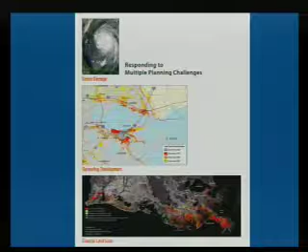I attended some of their meetings. The outreach was unprecedented, and it is the capstone of the many new urbanist projects systematically done in Louisiana under the aegis of the Center for Planning Excellence, which was formed as the client for this project, working with Calthorpe and Associates.

What they did is cover the 35 parishes of Louisiana—it took about a year—a regional land use plan with a three-part focus: to recover sustainably, to grow smarter, and to think regionally, reflecting the residents' desires to rebuild with minimal sprawl and maximum attention to environmental conditions. Another one of Peter Calthorpe's typically competent regional plans—because it's now commonplace to be very competent. He has made it commonplace.

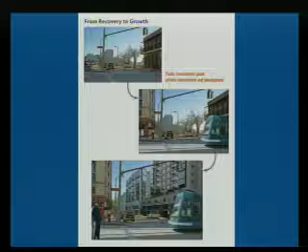I don't know, this was a particularly profound project for me. It wasn't typical in any sense of the word. The people of Louisiana rose to extraordinary challenges in the midst of probably the most painful moment. As I said earlier in the session we just had, I had real misgivings that it was the right time to ask the larger questions. When people had lost their homes, their neighborhoods, their friends and family, going in to begin a discussion about the larger economic, ecological, and land use future of the southern part of the state seemed a bit much, a bit too challenging.

The astounding thing was just how easily, readily, and profoundly they all rose to what were really complex questions, engaging that at the same time they were engaging the most fundamental survival issues. It was just heartening beyond belief—and also the consensus that resulted, the opportunity to make a real difference there.

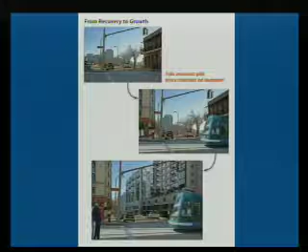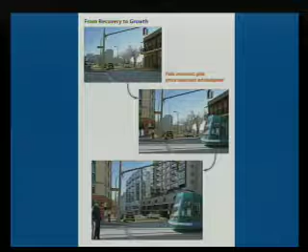I think the seeds have been planted, largely because of Robin Rather here, and Rachel. Robin did a lot of the communications, surveys and community participation work, and Rachel represents the group that was bold enough to go out and do this in the middle of the madness, and orchestrate it. This was married to three tiers: Ray Gindroz and Andres. We were all working together, trying to manifest the three levels of new urbanism simultaneously in this hardest of contexts. I'd say we all succeeded, and it was quite extraordinary. Thank you.

The next two projects show some global reach at this big scale of the region, metropolis, and town. Both of them are supersized university plan projects in faraway places. The first one stands out in pretty powerful contrast to the anti-urban development so rampant in nearby Dubai and places like it. Here's one that's street-oriented, and it stands out in contrast also to the kind of export that many US-based design firms have been doing, delivering conventional sprawl and spectacular but anti-urban high-rise buildings in the Middle East during this period.

This project is the King Abdullah University of Science and Technology in Jeddah, Saudi Arabia. It was submitted by HOK. The site involves 3,200 acres of coastal desert along the Red Sea, 50 miles or so north of Jeddah. It's a modern, academically oriented, sustainable city that helps transform their national economy and higher education system through urbanism. Let's welcome the HOK team.

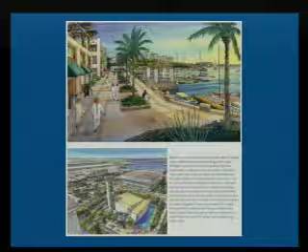I'll do Vedanta, Andres. You want to say anything about HOK?

We all talk about small is beautiful, but we have to be able to think big as well, and you're going to see that in this project. The Vedanta University Master Plan in Orissa, India, is an example of the kind of ambitious and holistic action required amid exploding populations. This is intended to unite, instead of dividing, the academic components and the rest of university life.

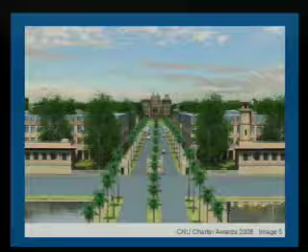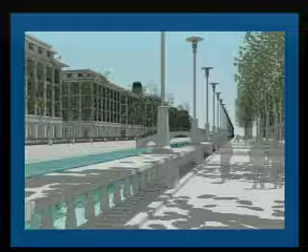It was submitted by Ayers Saint Gross, architects and planners, and includes approximately 8,700 acres of undeveloped land between Puri and the state capital. What they have is a master plan for one of India's newest universities, along with the supporting community, and how it's expected to grow over the next 15 years in a way that's uniquely sensitive to place, culture, and environment. It doesn't look like North American new urbanism set down in India, instead it incorporates the culture of its place. Let's welcome the Ayers Saint Gross team.

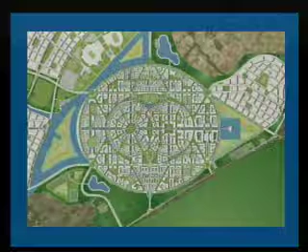Thank you. This has been a wonderful project to work on, and it's really a donation by one Indian industrialist who found himself with a phenomenal amount of money and decided he couldn't spend it all on cars and apartments, so he decided to give just about all his money to form a university in India. The shortage of university seats in India currently is about 500,000, and he said in one of our conversations, 'I'll take 20% of that, and I'll try to solve that problem.' So he has donated $1 billion in a foundation to start this university, very much in the tradition of Leland Stanford or Carnegie, and has now committed close to $3.5 billion to complete it.

We're really proud that construction, at least the groundwork, started three months ago, and they plan to open the university in three years for 12,000 students, with the next phase for 45,000 students, and the next phase after that for 100,000 students. It's really great to realize there are people like that around who are willing to be philanthropic with their money, and this has spawned several other Indian industrialists across the world to come forward and contribute money. Not too long ago, we received another commission to do another university for 30,000 students in India, based again on a donation by some individuals.

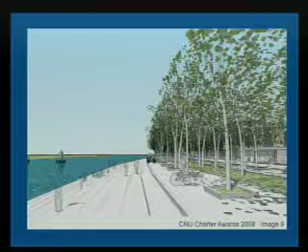The next award goes to a project called A Civic Vision for Central Philadelphia, submitted by WRT, Wallace, Roberts, Todd. Interestingly, the client and design team leader is Penn Praxis, University of Pennsylvania School of Design. It's a fantastic project, enormous in its scope, site approximately 1,153 acres of Philadelphia waterfront, stretching for 7 miles along the Delaware River.

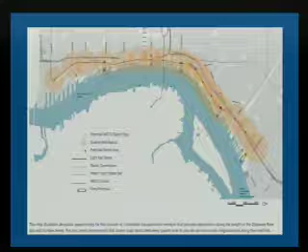A thorough plan to restore historic street connections within a supportive urban framework to revitalize Philadelphia's underappreciated Delaware River waterfront. Having seen work done, in fact a regional plan for Central Florida done with extreme competence by the same group, Penn Praxis, University of Pennsylvania, I think they really are the group to watch coming up. If students can do work of this quality, it's really extraordinary. Of course the students and faculty together, but the idea that students and Wallace, Roberts, Todd can work together

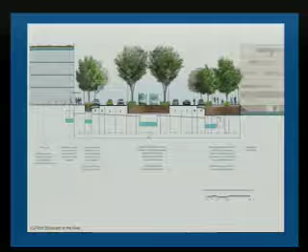gives rise to the idea of an apprenticeship. Apprenticeship as a way of learning both urbanism and architecture. It might be the way to go if these projects are the result.

Thank you. It was a unique experience working with Penn Praxis. Typically when we're working on projects of this scale, we're working with cities. And in Philadelphia, we're in the midst of a reform movement in city government that's focusing back on planning and urban design. So I feel very lucky to be working on this project.

I'd like to thank CNU and the jury on behalf of the citizens of Philadelphia, because the strength of the plan, beyond just the implementation of the principles of the CNU, is the civic engagement that led up to that process. Not only was Penn Praxis part of the team, but Penn's project for civic engagement was key to the development

of the citizens-based values and goals that drove the plan. So what's interesting about the work is that out of the grassroots efforts came the same principles that our Congress espouses. So I'd like to thank the jury on behalf of the citizenry of Philadelphia. Thanks.

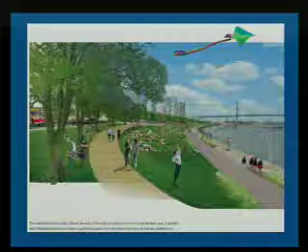We move now to the scale of the neighborhood, district and corridor. One piece of advice to applicants in next year's and future years' Charter Awards: the slides you submit, the images assembled into a slideshow for the jury to use, are of paramount importance in your application, because the jury has to go very fast through dozens and dozens of projects. So that basic information sheet and the images end up being a very valuable tool for us to remember what project we're looking at and to see a lot of them very quickly.

Well, this next project was proof, through those images, that the HOPE VI leadership from CNU is still delivering dividends, and in fact is still delivering some of the best yet of the genre. This one especially stood out because of a richer blend of building types that we could see in those pictures. It's Oakwood Shores in Chicago, Illinois, submitted by Fitzgerald Associates Architects.

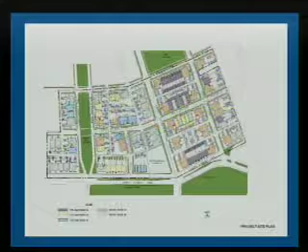The owners and clients are Chicago Housing Authority, Community Builders Inc., Granite Development, Ujima, and MB Real Estate Services. It's a 35-acre area, part of a larger neighborhood renewal program on Chicago's south side, and is a HOPE VI funded redevelopment that replaced public housing with a neighborhood of mixed income houses, row houses, and flats, reestablishing the traditional street grid and reconnecting to surrounding neighborhoods. Oakwood Shores.

We'd like to thank the Congress for our award. As you see, there's a lot of stakeholders in these projects. This is one of a number of the CHA's, Chicago Housing Authority's, Plan for Transformation projects. It's a tremendous undertaking what they're doing. Oakwood Shores is one of the first developments to come online, so it's really an honor to receive this award.

So of course we thank our clients, Granite Development, MB Real Estate, and Ujima, and the Community Builders from Boston, and also thank the community group. The Neighborhoods Working Group really shaped what we did. Certainly Chicago's context in some ways makes it very easy, but the community groups really influenced what we did, so we can't thank them enough, and they continue to influence what's going on there today. Thank you very much.

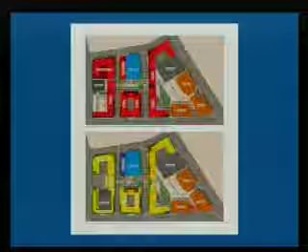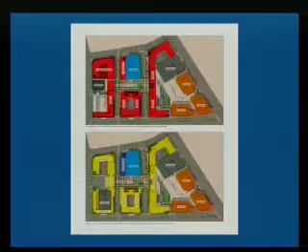Just a little anecdote. I know the project is superb, and I remember at one point randomly meeting the mayor of Rockville, and what he wanted to talk about was so strange -- he wanted to talk about the width of sidewalks. He said, 'Andres, what I really want you to know is, do you think an 18-foot sidewalk is wide enough?' So obviously, although he does not appear here, there's a great deal of intervention by the mayor of Rockville in having this be as good as it was. It was also done very quickly. I remember meeting that mayor just a couple of years back, and lo and behold the project was done two years later. I think that shows how government can also help rather than hinder.

Thank you. I'm humbled by your comments. That's wonderful. I'm Eric Lieben.

I'm Director of Design for WDG Architecture. We sort of got on this job a little bit late in the game -- we were the facilitators of a pre-existing master plan. I think one of the true challenges was seeing this thing through during a declining condo market in Washington, D.C.

We've had some wonderful motivation, especially from Mayor Giammo of Rockville. He was really the glue that kept this whole thing together. He's no longer mayor there, but not as a result of this project, I hope. It really took that force, a politician who just loved architecture -- he loved turn-of-the-century Rockville. He was the one who led to the establishment of guidelines. It was a wonderful broad-based public-private partnership. There was a great deal of input by the citizenry, probably three or four years before I even got involved. But that sort of love of old cities, I think, directed this thing and helped it reach its conclusion. Again, I have to thank our clients, RD Rockville and Federal Realty, and of course the City of Rockville. So thank you.

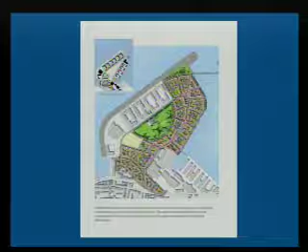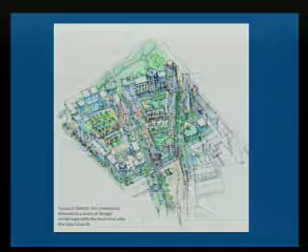A few notes: Robert Adam is one of the most effective architects and planners in England, bridging the ideas of new urbanism, the Prince of Wales, traditional architecture, and the conventional Royal Institute of British Architects. He's one of the people connecting very effectively with essentially a hostile profession in England. I would say we should do everything possible to get him back here every year, because we need that kind of person both here and there. And I'd love for this project to win. Also remember, projects in England, even the bad ones, the prior project, tend to be fairly good. So in order to achieve the throwing out of an existing one, it really has to be much better, because the standard is higher. Anyway, Robert Adam.

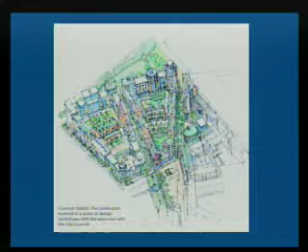Well, hello everybody. This is clearly a great honor for me and for everyone who worked on this project, a particular honor because I've been associated with the CNU for so long now that I have a room full of friends. It's a fantastic pleasure to be able to say that to all my friends in the audience, and all the ones who will hopefully become better friends in the future. And like all friends, I'm slightly critical from time to time, as you know, but that's how good friends are. So it's a fantastic honor.

I have to say I'm going to read out the other participants because it's very important. I don't call myself a master planner in these projects, I call myself the chairman of a master planning team. There's my client, who's stuck with this through thick and thin, and there's been some pretty thin times. Alan Baxter Associates, Highways Engineers, most important, and Arup as well. We had engineers, GVA Grimley Planning Consultants, Gray Marshall Associates Executive Architects, Landscape Design Associates, and Gardner and Theobald Quantity Surveyors, Cost Consultants. I have to add one more, we also had realtors involved, and this is very important, I'll finish off with that.

But I want to make one point. I'd like to offer this as a bridge for the CNU with the CEU, the Council for European Urbanism, a brother organization or a sister organization, depending how you feel about it, because in Europe we share so much culturally with the United States.

I mean, so much, but we also have differences. And I think the existence of the CNU is a precise expression of that very close association and that recognition of difference. And I'm so pleased that this project is recognized by the CNU and we can all understand this.

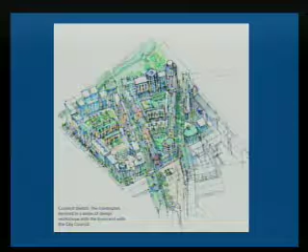The next project utterly proves the unique new urbanist notion that you can get better by growing. And it does it in a traditional downtown and Main Street setting in a municipality nearly swallowed up by Atlanta's northward sprawl. This is Woodstock Downtown in Woodstock, Georgia. It was submitted by Tunnell Spangler, Walsh & Associates, and their developer is Hedgewood Properties. What they did was expand the capacity for compact mixed-use development in character with a historic downtown and helped realize the regional vision that will counter the effects of sprawl. Congratulations to Woodstock Downtown.

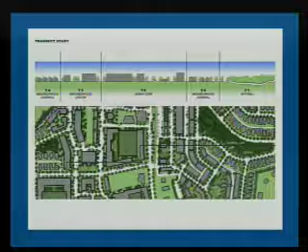It's a great neighborhood to come visit when you come to Atlanta in 2010.

Hedgewood Properties and community is a very important component to Atlanta in that they are creating wonderful neighborhoods, not just in Woodstock, but throughout the metro area, and are setting the example for the rest of the planning community as well. They also have an important component in that the Achilles heel of new urbanism for a number of years has been the commercial part of it. And having Sherry Morris, who's the president of the commercial, has really helped energize and help us understand how commercial needs to work in the suburban model. We are in the battleground, in my thinking, in that the suburbs of Atlanta certainly need to grow, but they need to grow in a much more constructive way.

The other important component, already mentioned by others, is that Richard McLeod, the city planner, very seldom will you get a champion that sticks with it as long as he did. Richard McLeod is truly one of the most important components that made this whole project work, in that he kept the political side intact. So we really are appreciative of this, and thank you so much.

That team has people in it who are on their third and fourth new urbanist project, which is both heartening and a little bit frightening.

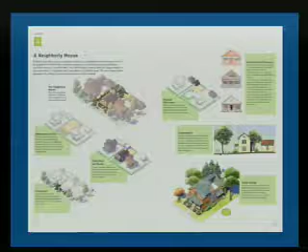The next one is a pattern book for neighborly houses, submitted by Urban Design Associates. The client was Habitat for Humanity International, with help from the Institute of Classical Architecture and Classical America. A wonderful combination of architects dedicated to excellence, normally associated with high-end work, bridging the technical gap between what they've learned through elegant practices and helping the poorest of the poor in America.

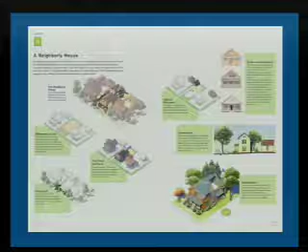The site is traditional neighborhoods throughout the United States. It's the kind of design guide that helps developers build and improve the quality of affordable housing. This is another one of the great UDA books, the first being the pattern book at Celebration.

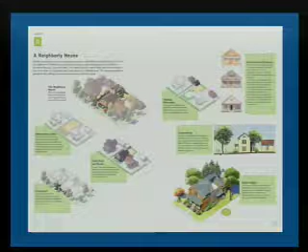They've done many important pattern books in Louisiana and Mississippi that have had effects even on the mobile home industry. It's an amazingly important tool, and like Peter Calthorpe, who reinvented the master plan and regional plan, dusting it off and giving it life, UDA has taken the pattern book, dusted it off, and given it life. These are miracles. We're a little too accustomed to seeing such good work. I think we should always celebrate when we see one.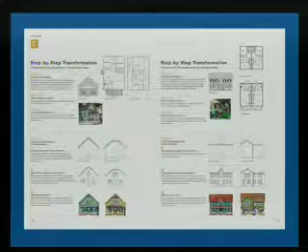Thank you very much. I accept this award on behalf of the Institute for Classical Architecture, Classical America, Habitat for Humanity, the National Endowment for the Arts, the Surdna Foundation, and Urban Design Associates.

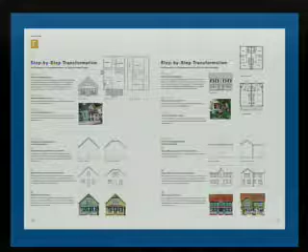The Congress of the New Urbanism is one of many organizations, perhaps the central one, in a constellation of groups concerned with these issues. One of them is the Institute for Classical Architecture, and we're trying to have as much communication as possible. Both Liz Plater-Zyberk and I are members of the board of directors, as is John Massengale of the Institute for Classical Architecture. And Barry Long, CEO of Urban Design Associates, I've also dragged up on stage to receive this award.

This began with a conversation in Washington between Paul Gunther, myself, and the head of Habitat for Humanity. He said, we know that 87% of Americans are comfortable with the thought of affordable housing in their neighborhood, if it fits in. Then Tom Jones said, that's our great failing. We need to change the standard of design so that our housing can be acceptable to more and more neighborhoods, so we can promote more mixed income, truly sustainable neighborhoods.

That's how this came about, and we sincerely hope it's an important step in that direction. So thank you, CNU, for recognizing that effort.

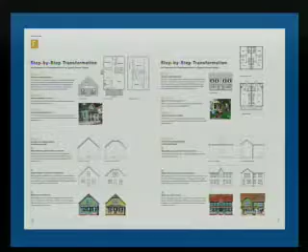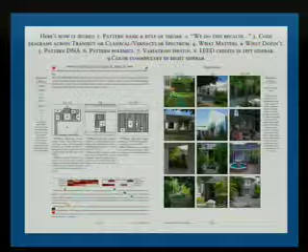This was submitted by Mouzon Design and published by his New Urban Guild Foundation. The site is all the neighborhoods of the Bahamas. It's a 'graphic architectural code' for a specific Caribbean locale. It also models a novel approach to getting to the core of what matters in an architectural pattern language: the architecture of the Bahamas.

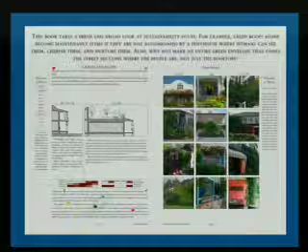I'd like to first thank Orjan and Amanda Lindroth and their band of like-minded visionary colleagues in the Bahamas who, not for a particular project but just for the future of the architecture of the nation, dipped into their pockets and commissioned the book for what we hope will happen down the road.

I'd also like to thank Jana Whitley, who was photographing with me, her sister, who is my wife Wanda Mouzon, who was cataloging the photos, and both of them for tolerating me in the months that followed so I could finish the book.

Quickly, one thing about the title of the book: it's not just marketing fluff, it actually means something. It's telling the truth in advance for what we believe it has a chance to do, which is to restart a new living tradition. Today most people say that's absolutely impossible, but like any good new urbanist who doesn't get interested in a project until someone tells us it can't be done, we said, no, maybe we actually can.

I got a fascinating email from Orjan about a week after the book came out, and three minutes after he hit send, before I could even read it, he called me from the Bahamas and said, Steve, it's really happening. I said, what do you mean? He said, there are builders here flipping through their first copy, and they said, that's what my granddaddy did. I need to start doing it that way again rather than the way I've been doing it.

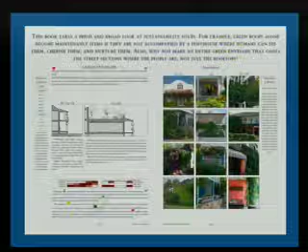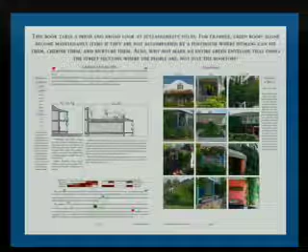So we have great hope that this is actually something that can take place, and hopefully it can be a model for ways of doing it everywhere. Thank you.

Steve is an amazing phenomenon. Doesn't seem to sleep - I believe he doesn't, actually. And his production, that book, was created in almost no time while doing many other things. By the way, it doesn't show in any of the photographs. The book is an inch thick, absolutely comprehensive, all over the Bahamas.

We want to particularly thank, because I know them well, Jana and Wanda for organizing him, because if it were not for them, absolutely nothing would be done.

And one other person - when you look at the elegance of a lot of the New Urbanist, the CNU production, the catalogs, the schedule that you hold, and the pattern books of UDA, there's a person behind this, a graphic designer called Terry Wolf, who has an extraordinary eye for putting together a great amount of information elegantly. If you look at what goes on in a page of one of the pattern books, that could really be what Paul Murrain calls a dog's breakfast - it can look awful, incoherent. Terry just pulls it together, and she is largely responsible for the look to the world, the brand look of the CNU. I think she also deserves applause after 15 years.

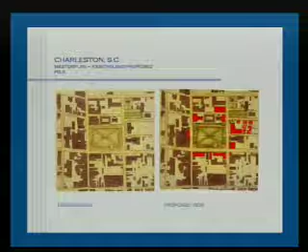And it is what used to be called, and I think we should begin introducing this name, a counter project - a project that is not commissioned, but either by countering an existing condition, an existing project, or imagining what it could be, they become catalysts. So this is a catalyst of the kind that was at the very origins of the European counter-revolution that Leon Krier was involved with some 30 years ago, which you might see in rational architecture - the architects initiating, taking hold, and doing something that ultimately cannot be forgotten, that it imprints itself on the city so that nothing less good can be built, but that something of that kind actually comes into being.

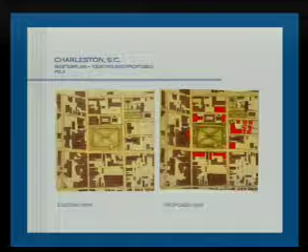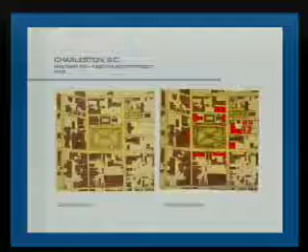Now, Fairfax and Sammons are the finest of fine architects. They have extraordinary clients. They could spend their days doing the most refined and elegant details for the greatest mansions that are being built now. And it is wonderful to see how they actually join us in the mud every once in a while - wrestling in the mud, which is what New Urbanists do. I'd love to have them here.

Thank you so much. We're not urbanists, we're architects, and we approach this project strictly through the buildings. And to quote Steve Mouzon, buildings need to be lovable. What we've tried to do, because we had a very simple urban project, was to create complex, beautiful, classical buildings that would capture the imagination and the passion of the citizens of Charleston.

Two neighborhood groups, the Committee to Save the City and the Mazyck-Wraggborough Garden District in Charleston, begged us to do this project. We had no budget, and so we gathered our wonderful team in the office - Ben Pentreath, whose beautiful watercolors you see, Marianne Cusato, who has come to great honor with her Katrina Cottages and Get Your House Right things, and Meredith Thompson, who decamped to California.

Just want to thank everybody on the jury for recognizing us, and thank you. Bye.

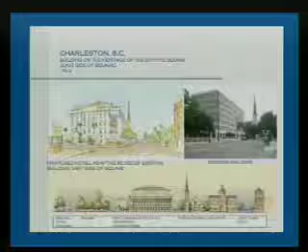The last two awards emerged from academic settings. Of all the student work we saw, everything that came to us got something powerful on screen - some big, single strong idea was there. We saw one that included post-apocalyptic versions of what might need to be done after peak oil. Another really got the basics of street-oriented and dignified addresses very powerfully right.

But the Andrews University project for the North End District in Michigan City, Indiana, had all of the singular things, but they were wound together into one civic art package. Thoroughness was the word of the day. This was submitted by the School of Architecture of Andrews University and their faculty, Troy Homenchuk and Andrew von Maur. The site is about 670 acres in downtown Michigan City, a city of 33,000 people between Chicago and South Bend.

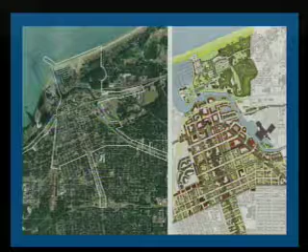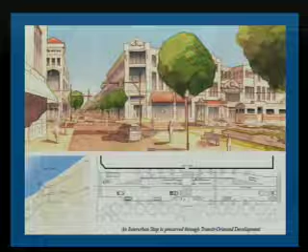Andres, would you like to add any additional comments about the North End District? I'd just like to say that among all the academic projects presented, there were 5 or 6 exceptional ones. Every year entries come in from the University of Maryland, Judson, Andrews, and Notre Dame. In this case, it wasn't better at the level of design, but at the level of the comprehensive project, as Victor said. But there is something extraordinary happening between these three schools of architecture, very close in proximity—Notre Dame, Judson, and Andrews, short drives from each other. Something extraordinary is emerging in America. It could be where the best architecture is taught at this moment worldwide.

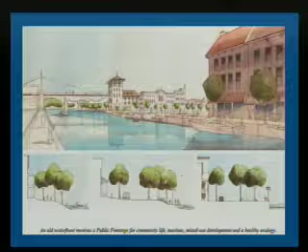Thank you very much. We're very humbled for our little school in Michigan to be included in this fine group. I know that many schools participate in charrette processes with their students. One of the things we've been very fortunate to do is to always have a patron that actually puts money behind the project, which has made a huge difference. In this case, the mayor of Michigan City, Indiana.

And the thing that happens every year is that the students who go through our curriculum, designed to teach them about these things, suddenly learn about the power of design when they're confronted with the real people in the charrette process that they're working for, and it changes their lives. So I encourage all of those who are in the academic environment to seek those kinds of opportunities, because it does change the students' lives in my experience, and it also changes the communities, because we're this non-threatening organization that comes in and puts out these proposals. And it's designed at a level that's not heroic, but simply well-executed, ordinary work. I think that's what makes the difference. So thanks again, congratulations.

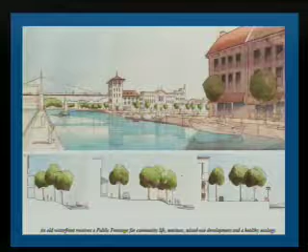That's what Liz calls plain old good architecture. So hard to find. The last project is one that was not a submittal, but it was the result of

a very exciting trip that the team took—actually, a trip to see the new School of Architecture at the University of Miami, designed by Leon Krier. We came back with such a buzz that we decided to give it a special award, unbidden, in the hopes that it would become a new tradition—that the team, when it meets in a city, might go out and take a candidate building, and if they find it good enough, like a building or a project that has not been submitted, they might give it what would be called a special jurors award. So this year, and hopefully the beginning of a tradition, is Leon Krier's School of Architecture at the University of Miami.